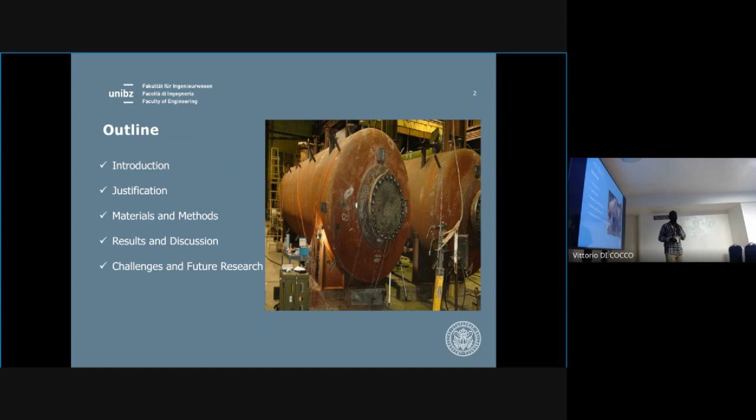So, for an introduction, from statistics, the weakness of most welded structures is fatigue. Statistically, it's responsible for at least 90% of failures in welded structures. And these welded structures are susceptible or vulnerable to uniaxial or multiaxial fatigue due to their numerous stress concentrations due to the welding.

So, ordinarily, from this diagram, you can see that we have two major types of welded joints in pressure vessels, which are the circumferential and the longitudinal. So most times analysis is done on these two major points. But for critical applications, we discovered there's a need to do multiaxial fatigue analysis so as to know the influence of the fatigue on all the axes possible in the pressure tank.

So this is an example of a pressure vessel that has failed due to fatigue. So this shows the importance of this research.

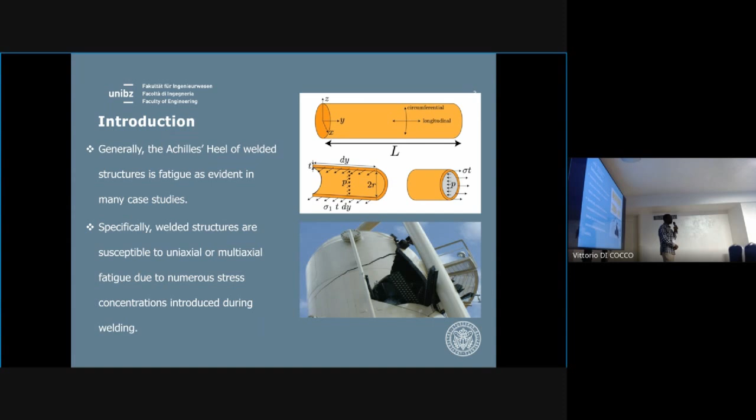So another thing about pressure vessels is that we discovered that the choice of welding process, be it TIG or submerged arc welding or laser, influences the strength of the pressure vessels, because different welding techniques bring about different weld geometry, different heat affected zones, different residual stresses and different weld defects and so on. For instance, a laser welded joint has a higher weld penetration than an arc welded joint.

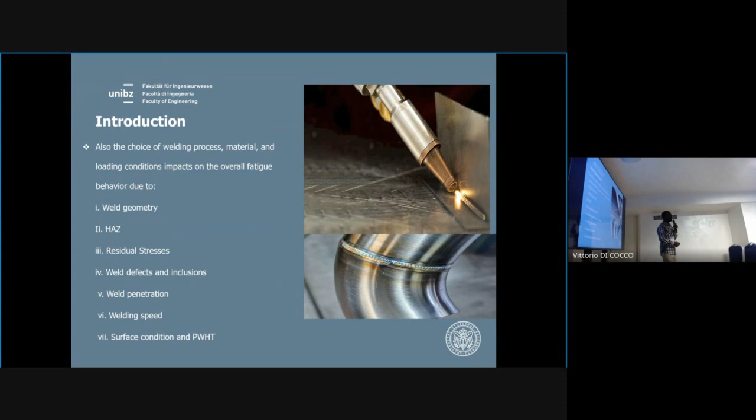So, still on the introduction, we discovered from literature that riveting used to be used for pressure vessels before, but nowadays it has become different because welded pressure vessels are more leak-proof and stronger than riveted joints. So there are organizations that have worked on this so as to design and ensure the safety of these pressure vessels. These are ASME, the European EN 13445, and some other ones.

But for this research, we discovered that under the ASME, there are two divisions: division 1 is design by rule, and division 2 is design by analysis. Division 1 is a kind of design principle that uses more material and thicker sheets to weld pressure vessels. So that's why division 2 was introduced, to reduce the thickness and make a cost-effective pressure vessel. So as the basis of this research, we are going to look at how to use division 2 to get more cost-effective pressure vessels.

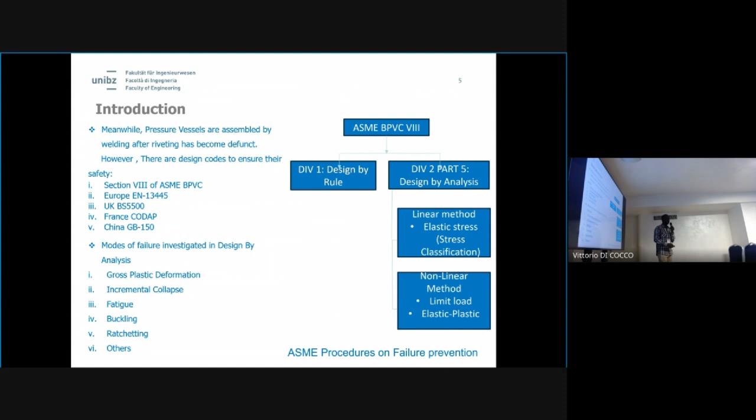So we'll be asking, why are we conducting research on this particular equipment? We discovered that to get a pressure vessel, it requires a lot of man hours, and most conventional welding methods, such as submerged arc welding, cannot be easily automated. So with the advancement of laser beam technology, it's found that you can automate these welding processes and reduce man hours on welding the pressure vessel.

So as part of our inquiry, we want to check whether these laser welded pressure vessels give better fatigue resistance compared to the other welding techniques.

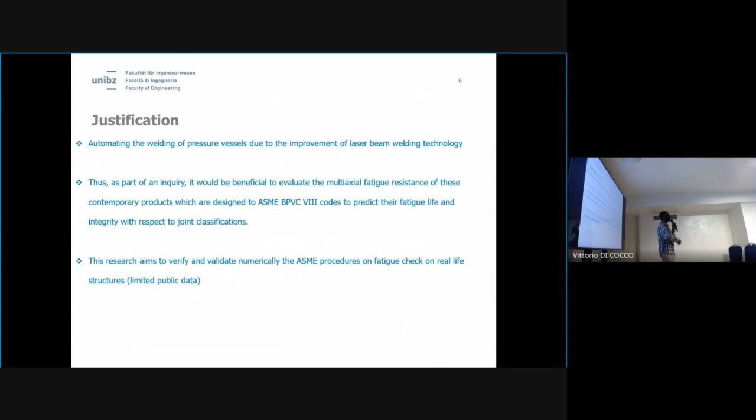So to do this, we are using a recognized standard, which is called ASME, and we are going to do calculations with FEA and correspond them with the calculations from ASME. So this is the proposed methodology for this research.

We get the design data sheets for the samples we are going to use. For this research, we are using stainless steel 347 because it's good for applications that require high temperature and higher pressure, such as boilers and nuclear reactors. So then we do the stress analysis. We know the fatigue loading cycles. Then we assess the multiaxial stress states, and in the end, we validate them and get the reports.

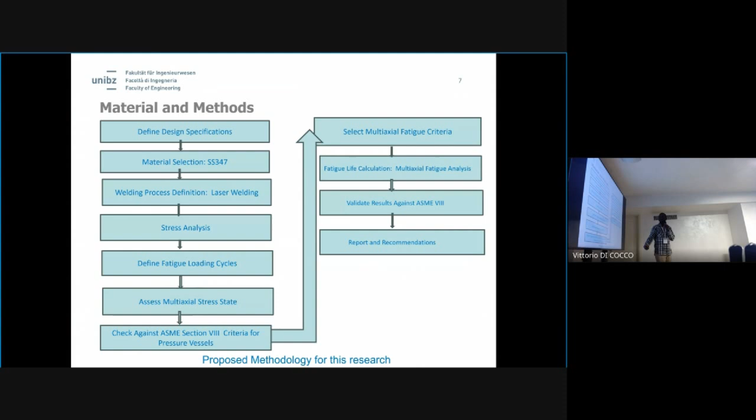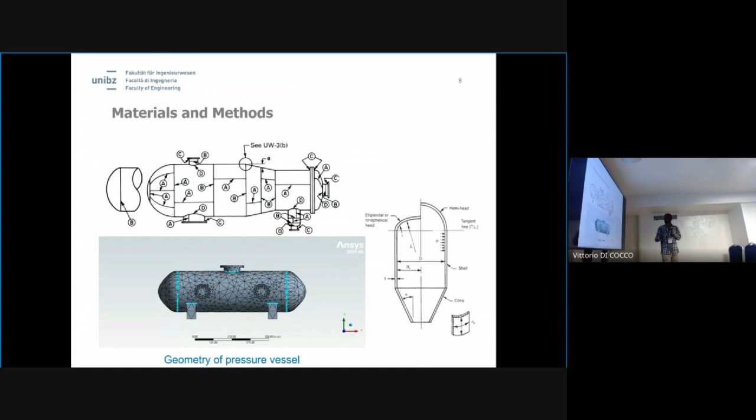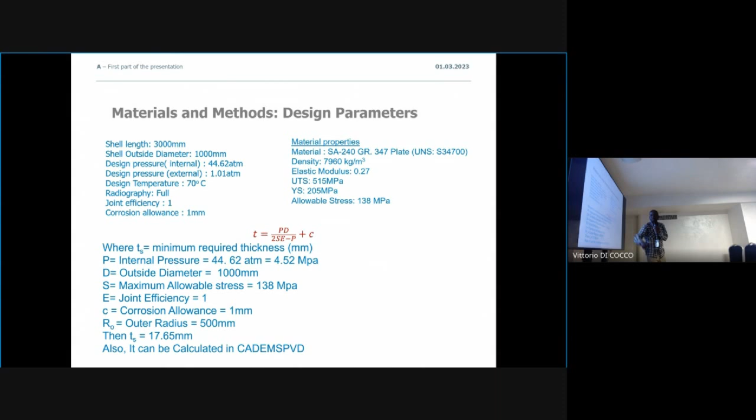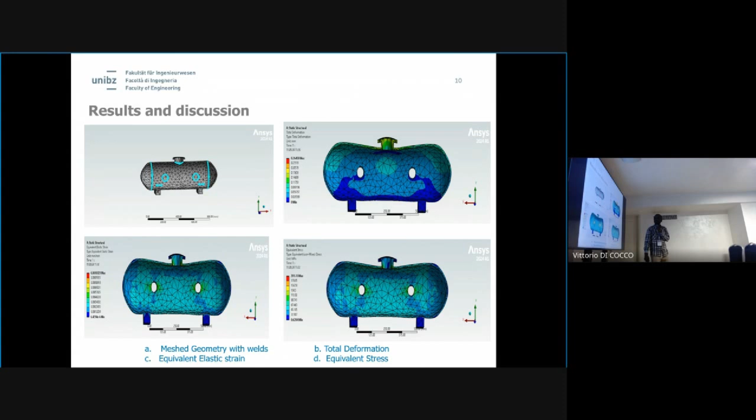So from the FEA analysis, we indicated the welded joints from the first picture, and after we applied pressure, we used a symmetric analysis. We cut the tank into 2 parts, and we applied pressure inside the tank and placed some fixed supports under the saddles and saw the influence of the pressure inside the pressure vessel. So we're able to compute the total deformation, the equivalent elastic strain, and the equivalent elastic stress.

So afterwards, we simulated and extrapolated the fatigue sensitivity of the tanks, and we discovered that for the strain life fatigue sensitivity, the tank performed better. So from this analysis, if you are trying to design a tank, you could know the kind of cycles you subject the tank to, whether it's low cycle fatigue or high cycle fatigue.

So the ones with the flat curve easily adjust to any changes to the pressure we apply to the pressure vessels. And another piece of information we could get was the mean stress graph, and this told us the kind of mean stress correction theories that were used in the simulation.

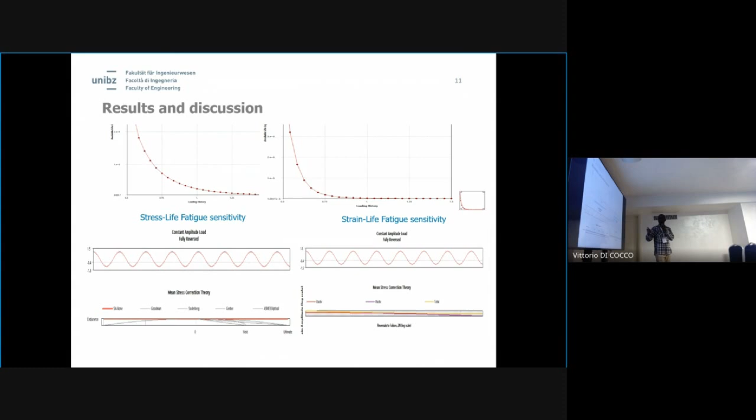So finally, even though we discovered that we could get a better safety factor from this analysis, there are still problems in getting these results. For instance, ANSYS still cannot simulate laser welding processes very well because it is currently limited to spot welds. So I'm right now looking for anybody that has any software that can do this analysis, which is how varying the laser power, welding speed, and laser beam dimensions affects the strength of welds in pressure vessels.

So another challenge we discovered is that other welding processes in FEA are still not up to date. Most of them are still one type of welding or the other. So there's a lot of room for research in FEA analysis of welded joints. So in the future, I plan to work on the crack propagation of laser welds in FEA.